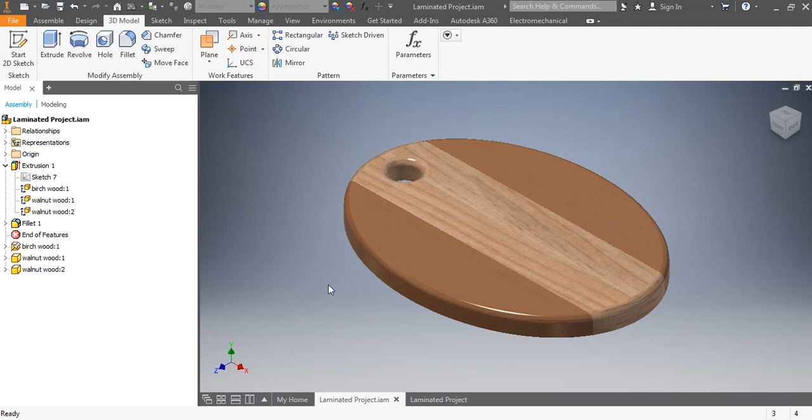Exporting your project to be used in Vcarve or Adobe Illustrator. So in this tutorial we're going to take out this project so we can use it in Vcarve and the CNC router. So to start with, you can see here if I expand, I find the sketch that I've drawn on, and I'm going to double click the sketch and get into it.

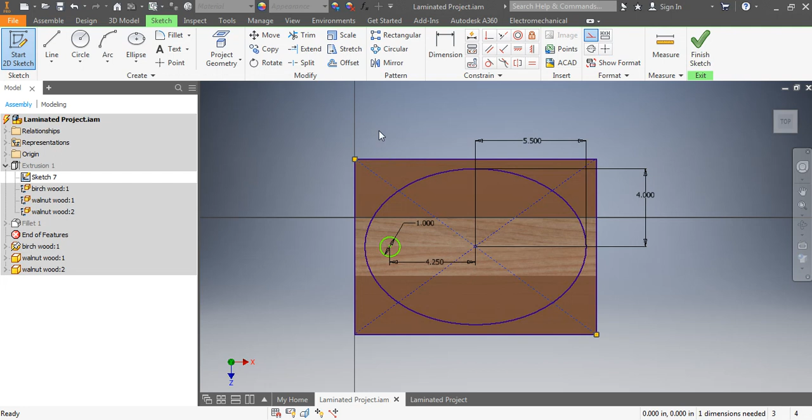Now the important part here is I don't want anything extra in here, extra lines. So the dimensions are okay, they don't matter. Okay, but these lines here you got to delete, otherwise they'll show up in the other programs. Okay, so I'm left with just my outside shape, my circle, and my outside box, which is still important.

Right? So I can basically just take the sketch now, right mouse click, and I can go to Export Sketch As. Okay, and you can see I already got one here, but I'm going to run you through it. So first off, there's two options here. You're going to export as AutoCAD DXF. Okay, this is a generic format that a lot of different programs will open.

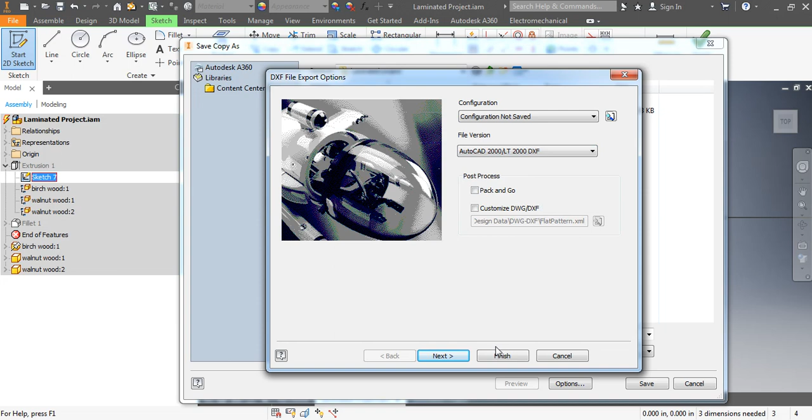From options, you're going to pick in here, okay, don't pick the newest one. Come down and pick AutoCAD 2000 or LT 2000 DXF because older programs won't like new stuff. Then we go to Next, and then here, Base View, Model Space, we're going to click on. Right? And after that, we're basically done, and we click Finish, and we're going to go name this.

I'm going to write over top of this one, so Laminated Project, and actually I'm going to put class in right away. So CLAA. Uh-oh, I just screwed up here. There we go. Laminated Project, CLAASSEN. Okay, and hit Save. Okay, so now we can just leave Inventor running, or you can close it off.

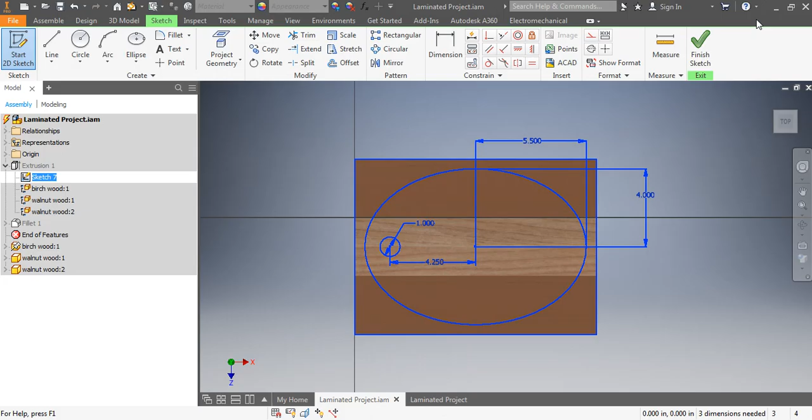Okay, so now what I'm going to do is I'm just going to quickly minimize, and I'm going to go to Vcarve and start Vcarve up. So it opens up like this. So this is the CNC router software. We're going to go create new file. Now, in here we're going to dictate how big our material is.

So first off, our material width is 12. Okay, the height is 9. Where did I get that from? Well, that's from your project that you drew. Okay, and then the thickness, I'm going to use calipers and measure the exact thickness. So I know that this project is 0.7. It's in inches. Now the Z0 position is very important.

You want to make sure it's set at machine bed. The XY datum position, you want to make sure it's set here, and use offset, make sure that's turned off. You do not want to use that, that'll screw up where it starts. And then we click on OK. Okay, so there's the piece of material. This happens to be now 12 by 9 on the screen, okay, which is exactly the same as your project. If it's a little smaller, you would make changes and make sure it's exact.

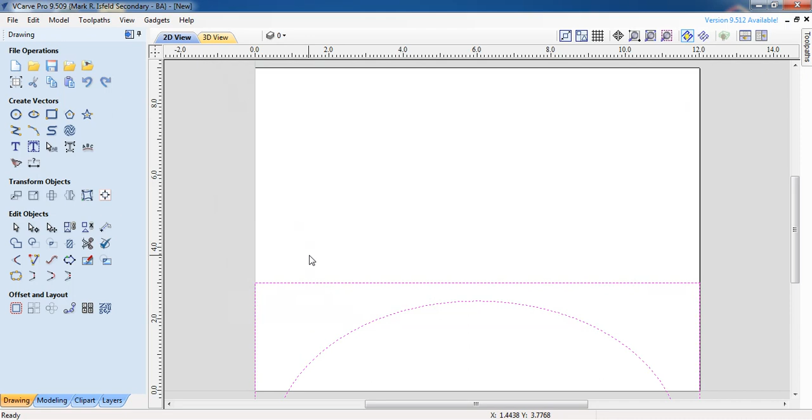Okay, and then we come up here to Import Vectors, click on it, and we're going to grab the project, right? So you might have to go searching for it. You can see mine's in Woodwork 9 Laminated Projects. Okay, so I click on that one, click Open, and you can see it comes in. Now, if I scroll out, you can see it doesn't fit on there yet. And you can see that the dimensions aren't here.

So I'm going to make this simple, and I'm going to come down to Transform Objects and go Align Selected Objects and Align to Material. I'm going to click on, and bang, it's done. Okay, and I can just close this off at the bottom, and there we go. So now the next thing I'm going to do is I don't need the outside box, so I'm just going to click the outside box and hit Delete.

So what we're left with is the shape. Okay, so when I click on it, you can see there's that. And there's that, and that's all I'm looking for, nothing else. All right, and that concludes the beginning of getting from Inventor to the CNC router. The next tutorial will be getting from the software out to the actual CNC router.